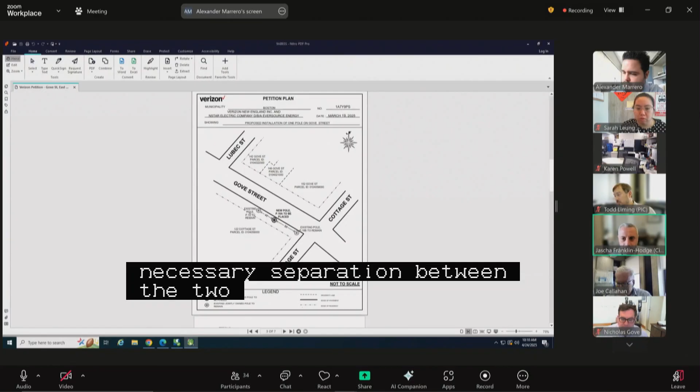All right, thank you very much. Commissioners, questions? Hearing none, I'll just ask one, which is, can you just articulate, these are going to have three poles quite closely spaced together. Can you just explain why that's necessary? I can't respond for Eversource, but my best guess is that their existing three-phase cabling is going to conflict with the new cabling, in terms of spacing between the two sets of cabling that they will be installing. So they're requesting a new pole in order to provide the necessary separation between the two. I see, okay. So there's vertical congestion on the existing pole, and they'll need to have something that would not otherwise be attachable because of those spacing issues. Correct. Okay, got it.

All right, appreciate that. Commissioners going once, going twice, questions? PIC staff or members of the public? I will take this opportunity to remind the public, if you wish to ask questions or add testimony, please use the raised hand function, found under the reactions tab at the bottom of your screen. I do not have any comments or questions at this time, and I do not see anyone from the public, so I think we're all set. All right, do I hear a motion to approve utility pole hearing number 1? I make a motion to approve a joint petition by Verizon New England and Eversource to install the utility pole in the area of Gove Street, East Boston, as further read into the record by the chair.

Second. All in favor? Aye. Aye. Aye. Any opposed or abstained? So moved. Thank you very much.

Thank you. All right, on to the public hearing section of our agenda, starting with public hearing number 1: a petition by the City of Boston Public Works Department for the making of specific repairs within the following public ways in Dorchester, consisting of curb realignment, roadway and sidewalk reconstruction, as well as new and relocated pedestrian ramps, specialty pavement, street lighting infrastructure, storm drain infrastructure, street trees, and driveway curb cuts.

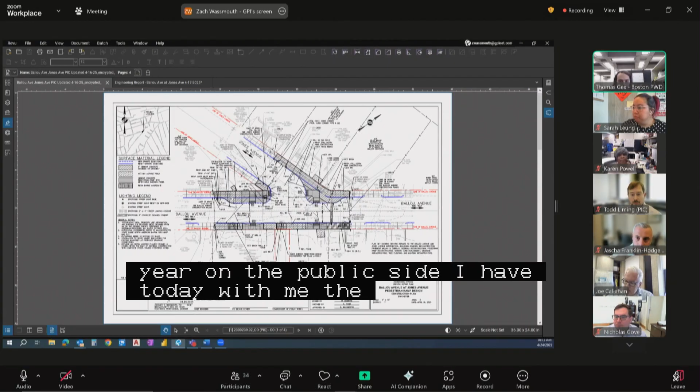Just a little bit of project background in case anyone wasn't here at the previous hearing, new business. This is part of a state of good repair project to repair the streets of Jones Ave, Ballou Ave, Jacob Street, Mascot Street, Dumas Street, Willowwood Street.

This project began because there was a pedestrian bridge, labeled as a discontinuance, that was removed several years ago over the MBTA tracks. As part of the mitigation for that project, we're looking to add improvements to this neighborhood. So this is part of a larger project for state of good repair and sidewalk repairs, et cetera.

So I'll pass it over to Zach, who can go over specific details and what we've addressed from new business. Hi everyone, Zach Wassmouth from GPI, the designer helping out Public Works for this project. A few comments that came in since last time were from National Grid related to the gas line over here that runs at this bump out.

They had some concerns about where some of the infrastructure was located in proximity to the gas line. So the adjustments we made were relocating the street light a little bit, relocating this drainage inlet here a little bit, and removing the tree which was located in close proximity to the gas line at this location.

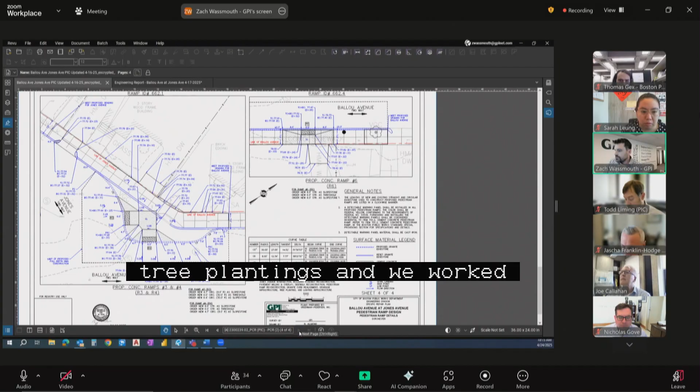Other comments we got were related to the tree plantings, and we worked with the Parks Department to update the details to make sure they were consistent with what the Parks Department was looking for with respect to how the trees were planted. So we added some notes on there and coordinated with them. But in general, these locations are the same. These are just the notes that were added.

In addition, we are working actively with the Parks Department to determine exactly what the tree species are out there. That'll be settled prior to installation and construction. We're also working out a comment that came in from the Planning Department related to the tree planting and the soil underneath.

I think that about sums it up, Thomas. Is there anything else we wanted to add? No, yeah, I think that sums up new business and the comments we received.

Okay. Commissioners, questions? PIC staff or members of the public? All set here. We appreciate the plan updates.

All right, easy enough. Do I hear a motion to approve public hearing number 1? I make a motion to approve the petition by the City of Boston Public Works Department for the making of specific repairs in the area of Jones Avenue, as further read into the record by the chair. Second. All in favor? Aye. Aye. Aye. Any opposed or abstain?

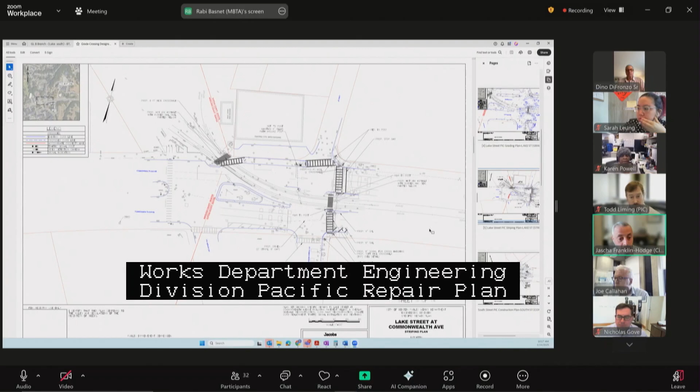This was new business on April 10th, as shown on a set of plans entitled City of Boston Public Works Department Engineering Division Specific Repair Plan, Lake Street at Commonwealth Avenue, South Street at Commonwealth Avenue, Brighton, 14 sheets dated February 2024. Would the proponents please introduce themselves, their affiliations, and give us an update on your proposal since the new business hearing?

Good morning, Commissioners. I'm Dino DiFronzo Sr., the Municipal Liaison for the MBTA Green Line Program. With me today is Rabi Basnet, the MBTA Project Manager. This specific repairs request involves accessibility improvements on the Green Line B branch at Lake Street and South Street. And we are ready to go.

Please note, we had a change in PMs at Jacobs, and because of that, we realized we did not get BTD signals the plans in CAD format. But I spoke with Al Valar yesterday, and we'll be getting those plans to him very, very quickly, hopefully tomorrow. So there's no issue there, but I just wanted to bring that up before Rabi gives you a little technical rundown.

Thank you, Dino. Good morning, everyone. Again, my name is Rabi Basnet, MBTA Project Manager. The proposal of this project is to improve pedestrian crossing along the B branch of the Green Line. These improvements are designed with safety, accessibility, and ADA compliance in mind. The project focuses on the demolition and reconstruction of a series of pedestrian curb ramps along Com Ave at Lake Street and South Street. The main elements being addressed are pedestrian curb ramps and curb extensions.

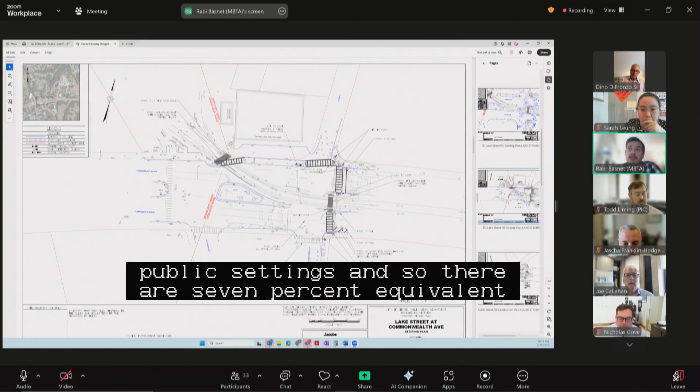There are 7 pedestrian curb ramps that we'll be installing as part of this project at Lake Street. And we have 3 curb ramps that we will be installing at South Street. So that's all the scope of the project.

All right, thank you very much. Commissioners, questions, comments? All right, hearing none, PIC staff or members of the public?

All set on this. All right, do I hear a motion to approve public hearing number 2? I make a motion to approve a petition by the Massachusetts Bay Transportation Authority for the making of specific repairs in the area of Commonwealth Avenue and Lake and South Streets, as further read into the record by the chair. Second.

All in favor? Aye. Aye. Any opposed or abstain? So moved. Thank you very much. Thank you, commissioners. Have a good day. Thank you. You too, Dino.

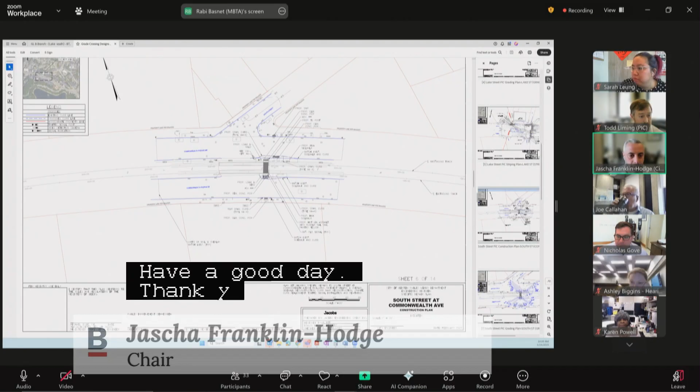All right, on to public hearing number 3, on a petition by Seaport Square Development Company LLC for the acceptance of a pedestrian easement adjacent to Seaport Boulevard public way, South Boston, located on its northeasterly side at address number 88, southeast of Fan Pier Boulevard. New business on April 10th, as shown on a plan entitled City of Boston Public Works Department Engineering Division Pedestrian Easement Plan, 88 Seaport Boulevard, Parcel D, Seaport District, South Boston, one sheet dated March 2025.

Would the proponents please introduce themselves, their affiliations, and give us an update on this proposal since your new business hearing? Good morning, members of the commission. My name is Jody Sanchez from Goulston & Storrs. I'm here on behalf of the petitioner, Seaport Square Development Company LLC, the master developer of the Seaport Square project. I'm joined today by Coleman Horsley from Nitsch Engineering.

We're before you today to respectfully request approval of a pedestrian easement over a sliver parcel relating to the Block D project of Seaport Square, located along Seaport Boulevard between Fan Pier Boulevard and Block F of the Seaport Square project. As a reminder, the pedestrian easement over this sliver parcel will complete a set of adjacent pedestrian easements approved by the Commission in 2022. At the time the sliver parcel was owned by the MBTA; it has since been conveyed to the petitioner, and accordingly we are now seeking completion of the pedestrian easement area.

Since we were here two weeks ago, we have finalized the pedestrian easement with the Commission's legal counsel. I'll turn it over to Coleman to walk through the plan.

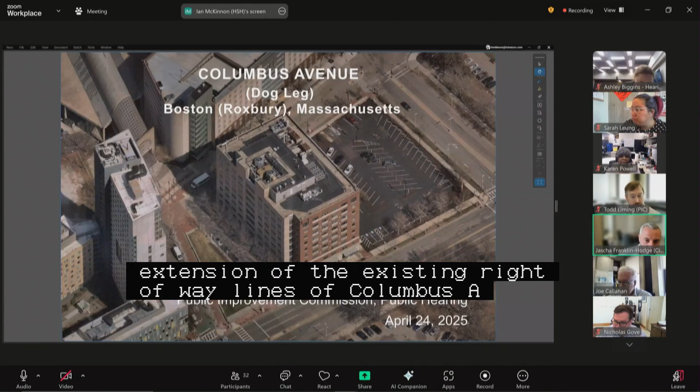On to public hearing number 4, on a joint petition by Northeastern University and the Boston Redevelopment Authority, DBA the Boston Planning and Development Agency, for the widening, relocation, and extension of the existing right-of-way lines of Columbus Avenue, Public Way, Roxbury, as well as for the acceptance of highway easements from its current terminus at Melnea Cass Boulevard to a point at Tremont Street, located generally across from Ruggles Street.

This was new business on April 10th, as shown on a plan entitled City of Boston Public Works Department Engineering Division Widening, Relocation, and Extension Plan, Columbus Avenue, Public Way, Roxbury, one sheet dated February 26, 2025. The proponents, please introduce yourselves, your affiliations, and give us an update on any changes since your new business hearing.

Good morning, Mr. Chairman and members of the Commission. My name is Joe Connolly, project engineer from Howard Stein Hudson. I am presenting today on behalf of the proponents, Northeastern University and the Boston Planning Department. I am joined by Viktorija Abolina of Northeastern and Jim Fitzgerald from Planning, as well as Ian McKinnon from our office.

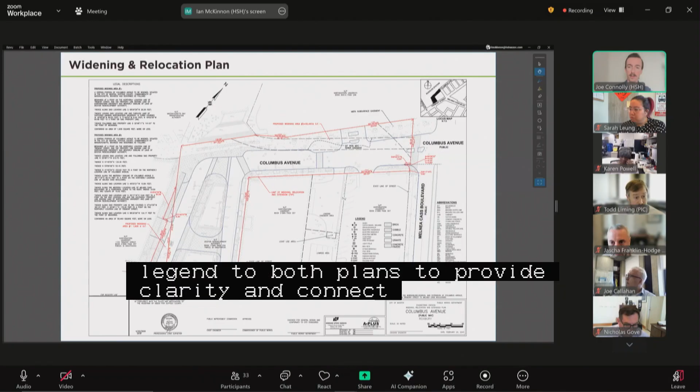We presented at new business two weeks ago for the widening, relocation, and extension of the existing right-of-way lines of Columbus Avenue. There have been minor updates to the plan based on feedback from PIC staff prior to new business. We provided those updates yesterday, but to summarize, we've hatched the specialty roadway surfaces and added a legend to both plans to provide clarity and connect these items to the language in the license agreements. There were no other changes made or requested. So with that, I will open it up to any questions.

Commissioners? I will ask, where are you in terms of the legal documents associated with this, and are there any outstanding issues associated with those? Victoria, are you able to comment on that?

Sure, good morning everybody. Viktorija Abolina, I'm a VP for Campus Plan Design at Northeastern, and I'm joined by Mitali Biswas, who is in the Office of General Counsel. So we're very close. I'm going to let Mitali chime in, but we've been working very closely with the city lawyers, the Boston Planning lawyers, and BPDA lawyers. So I think we've pretty much agreed on finalizing the language, but Mitali, if you can weigh in just on where we are.

Sure. So over the past two weeks, we have continued our negotiations on the pedestrian easement, the two highway easements, and the license maintenance agreement for the specific repairs. The first three—the pedestrian easement, the highway easement with Northeastern, and the highway easement with the BPDA—those are finalized. We have a couple of outstanding questions going back and forth between our end and Chong Liu of the city's attorney to finalize the LMA, but I think we're very close, and hopefully we should be able to wrap that up very soon.

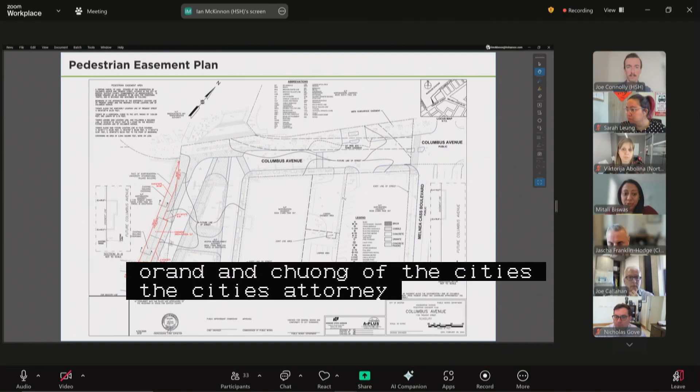Okay, so presuming we approve this action today, the finalization of all of this is still contingent on completion of that agreement, correct? Yes, understood, but just noting that we're very, very close, so hopefully that should not be an issue.

Yeah, got it. And also to confirm—I know this came up in the new business hearing—will the university be accepting maintenance responsibilities for the entirety of this area, including any specialty materials and designs located here?

Yeah, and Victoria, feel free to chime in if you want to add anything. So the improvements are defined in the LMA, and it includes the specialty pavers, etc., and the brick in the streetways, as well as the non-standard light fixtures in the licensed premises area. To the extent that Northeastern, down the line with approval of the PIC, changes any of those specialty pavers, brick, or light fixtures to city standard materials that are then approved by PWD, Northeastern's responsibility for maintenance of those newly city standard materials would cease.

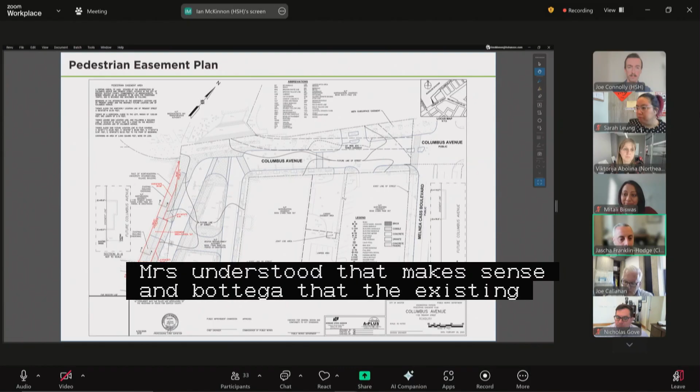Understood, that makes sense, and glad to hear that the existing non-standard materials will be maintained by you all. Those were my only questions. Commissioners, anything else? PIC staff or members of the public? No, all set on this. We really appreciate Northeastern's and BPDA's efforts on this. It's been a long time coming.

Indeed. All right, with that, do I hear a motion to approve public hearing number 4? I make a motion to approve a joint petition by Northeastern University and Boston Planning and Development Agency for the widening, relocation, and extension of the right-of-way lines on Columbus Ave, as well as the acceptance of highway easements, contingent upon completion of agreements as referenced by the chair. All in favor? Aye. Any opposed or abstain? So moved.

On to public hearing number 5, on a petition by Northeastern University for the acceptance of a pedestrian easement adjacent to Columbus Avenue Public Way, Roxbury, located on its southwesterly side at the side of 1155 Tremont Street, northwest of Tremont Street. This was new business on April 10th, as shown on a plan entitled City of Boston Public Works Department Engineering Division Pedestrian Easement Plan, Columbus Avenue, 1155 Tremont Street, Roxbury, one sheet dated February 26, 2025. Would the proponents please reintroduce themselves and their affiliations and give us an update on this action and any changes since your new business hearing?

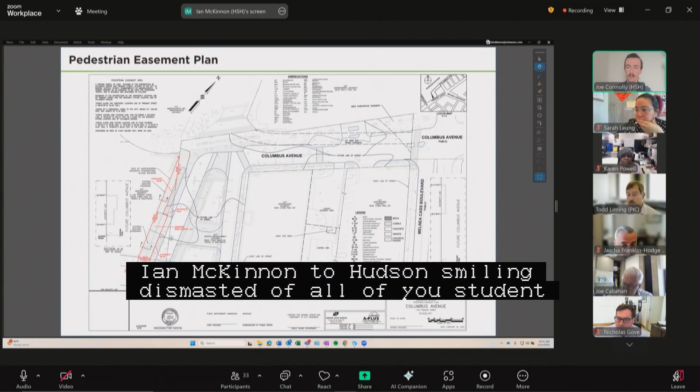Good morning, Mr. Chairman and members of the commission. Again, my name is Joe Connolly, project engineer for Howard Stein Hudson. I am presenting today on behalf of the proponents, Northeastern University and the Boston Planning Department. I am joined by Viktorija Abolina of Northeastern, Jim Fitzgerald from Planning, Ian McKinnon from Howard Stein Hudson, and Ms. Molly Biswas of Northeastern. We presented at new business two weeks ago for the acceptance of a pedestrian easement adjacent to Columbus Avenue. We made some minor updates to this plan based on feedback from PIC staff, which was also provided yesterday via email. Other than that, there were no further changes.

Thank you very much. Commissioners, questions, comments? PIC staff or members of the public? All set on this. All right, do I hear a motion to approve public hearing number 5? I make a motion to approve a petition by Northeastern University for the acceptance of a pedestrian easement adjacent to Columbus Ave, as further read into the record by the chair. All in favor? Aye. Any opposed or abstain? So moved. Thank you very much. We'll see you, I think, in our new business section in a little bit, but thank you very much for this.

Thanks. All right, okay. That concludes the public hearing portion of the agenda, so we can move on to new business, starting with new business number 1: Willowwood Street, Dumas Street, Marden Avenue, Dorchester, specific repairs, and a petition by the City of Boston Public Works Department. Would the proponents please introduce themselves, their affiliations, and walk us through what is being proposed?

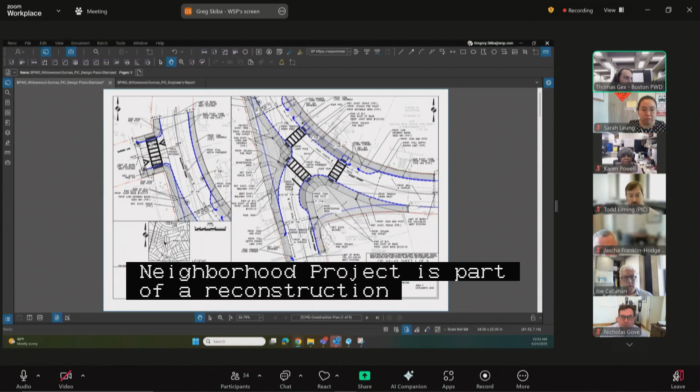Hello and good morning, Chair and members of the Commission. My name is Thomas Gex with the Public Works Department, petitioning for the specific repairs at Willowwood Street at Dumas Street. I'm also joined by our design consultant from WSP. I'll let Greg introduce himself shortly, but first I'll give some background on this specific location as well as the wider project it is part of. The Jones Avenue Neighborhood Project is part of a reconstruction project looking to rebuild the streets of Jones Avenue, Barlow Avenue, Jacob Street, Mascop Street, Dumas Street, and Willowwood Street, bringing them to a good state of repair. This project began as a response to the removal of the pedestrian bridge over the MBTA tracks that connected Barlow Avenue to Norfolk Street, and is done as mitigation for the loss of that bridge.

The project is looking to provide accessibility improvements, safety improvements, and additional street tree canopy throughout the neighborhood by repaving the roadway, reconstructing sidewalks, rebuilding pedestrian ramps, installing new street lighting, planting new street trees, and adding green infrastructure. I'll hand it over to Greg, who can talk about the specific repairs at this specific location of Willowwood Street at Dumas Street.

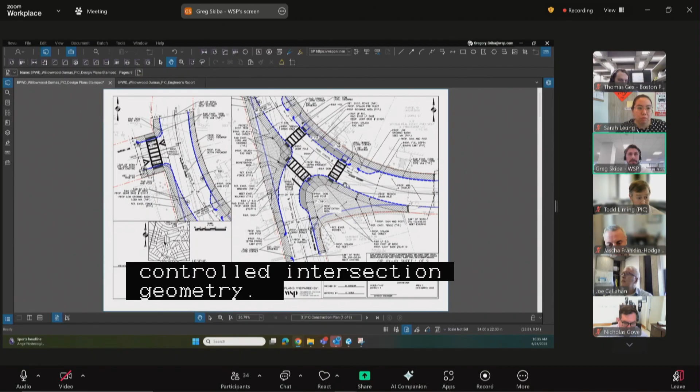By doing this, we are also reducing the crossing distances for pedestrians, installing a number of curb ramps and new crosswalks, and in those bump out areas, as Thomas mentioned, installing green infrastructure practices. We've been working closely with the Office of Green Infrastructure and other city departments on creating this design at the intersection.

It's also worth noting on Marden Ave, we'll be improving the safety and accessibility for pedestrians by installing a raised crossing. We've also run auto turn movements, and this intersection accommodates necessary movements for all vehicles: passenger, single unit trucks, and emergency vehicles. Happy to go into more details.

The other sheets of this package just kind of talk through the pavement design. We'll be doing a full depth reconstruction for the majority of the intersection with green infrastructure practices on the streetscape, and mill and overlay on the extents of the project.

The other details are pretty standard City of Boston details. As I mentioned, we've been working closely with Boston Water and Sewer and other utility companies, making sure that their infrastructure, the catch basins, manholes, and any other utilities are properly adjusted or relocated in the new intersection configuration.

We're also implementing the most recent set of Office of Green Infrastructure standard details in its design. So with that, I'll open up the floor to any questions. Thomas, do you have anything else that I missed that you'd like to add?

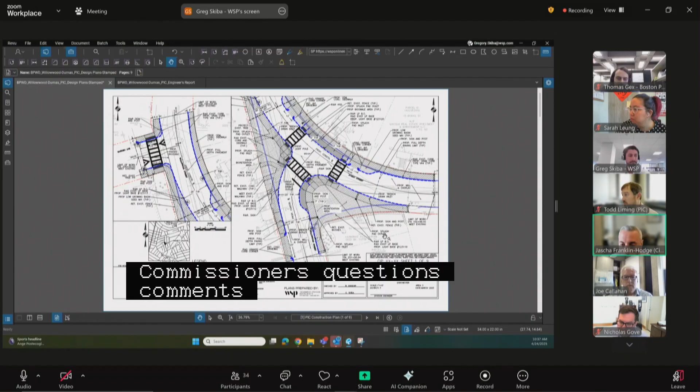Right, I have a couple. The maintenance of the bioretention areas and the green infrastructure features, what is the expectation for that? The expectation at this time is that maintenance will be done by OGI, still to be formalized, but that is the understanding at this time.

Okay, and we've confirmed that all of the plantable green areas of this sort qualify for maintenance under their available resources? I see a growing basin, for example, and it's unclear, is that a green infrastructure feature or just a planted area that maybe wouldn't require maintenance under a different arrangement?

There are a couple different scenarios here. One is a more formal, larger bioretention space. They've just recently given us planting specifications for specific species of plants they want installed there. Where Greg is highlighting to the right, that's a larger area where we can provide some drainage catchments. Some of these are just more of a native seedy grassy mix, which don't really require as much maintenance, and those won't be serviced because they're over the gas lines and utilities, et cetera.

So there's a mixture here of two different locations, but the intent, yes, and we've been closely coordinating with them, and so far this is intended to be maintained by them.

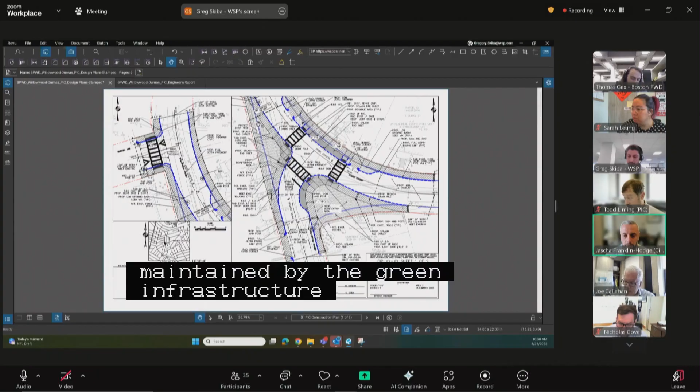Okay, excellent, appreciate that. I think if there are any elements, it would be great before your public hearing if you can confirm that all planted elements will be maintained by the Office of Green Infrastructure, and if there are elements that would require public works maintenance beyond what is typically done for green infrastructure features, things like mowing or trimming, that you coordinate with the public works operations team to make sure they're aware and comfortable with the design. Understood, will do. Thank you very much.

Second question, are there impacts here related to on-street parking that may be relevant to folks in the neighborhood? Because we're pushing it towards the intersection, generally no, the one side where we may be somewhat restricting parking, and it's because the signage is a little—

confusing—where we're putting the bump out between the two ramps on the northeastern side of the page. I can get you an exact number if we double check, but there may be a loss of a couple spaces technically there, but it's kind of within the intersection between a couple driveways. Other than that, technically no other legal spaces, because the curb lines are getting pushed so far into the middle of an intersection.

Got it, okay. And has there been any communication with folks in the neighborhood, or coordination with Office of Neighborhood Services, about parking specifically or about the design in general? We are recently coordinating with them for this overall project. This is kind of a new step for a state of good repair project, and in doing that coordination, I have reached out to the adjacent abutters.

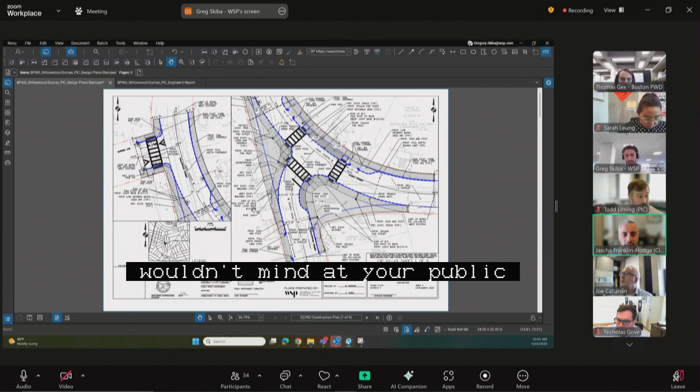Excellent. Thank you. I appreciate the outreach that's already done and still to come. If you wouldn't mind, at your public hearing just provide an update on the engagement plan. It doesn't all have to have been concluded by the time you are here again, but I just want to make sure we have an outreach plan that we will move ahead with as this project progresses. Understood, I will look to provide more details then. Thank you very much, those are all my questions.

PIC staff or members of the public? No, I think we're all set on this for now. Excellent, will you be ready for your public hearing in 2 weeks on May 8th? Yes, we should be ready. Greg, I think we've kind of basically addressed all the comments as far as I'm aware. Yes, I would agree. Yep. Yeah, go ahead, all right. Excellent, we'll see you back here for this then. Thank you. Thank you. Thank you.

All right, on to new business number 2, Medfield Street, Keswick Street, Boston proper, specific repairs on a petition by the City of Boston Public Works Department. Would the proponents please reintroduce themselves, their affiliations, and walk us through what you're proposing to do here.

Good morning, Chairman, members of the Commission. My name is Jeffrey Alexis with the Public Works Engineering Division, I&D team. Joined here by my consultant from Nitsch Engineering, who developed a number of these plans coming up next. As part of our roadway reconstruction program, our state of good repair in terms of providing maintenance improvements along these streets, as well as some additional safety improvements, including sidewalks, ramp reconstruction, the proposal of street trees, street lighting, raised crossings, and additional accommodations for bicycles as needed. I will turn it over to Jeff Sautel to share the plans and introduce himself.

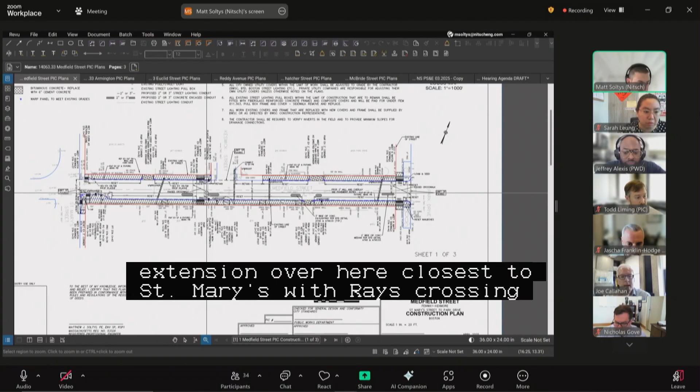Yes, and I'll also jump in that we are proposing to relocate the parking along Medfield Street onto the north side of the street, as the contraflow bike lane will be on the south side of the roadway. Lastly, as I mentioned, we are proposing lighting along this corridor. We are coordinating with the Parks Department as well as planning. I plan on scheduling an interim meeting to discuss how we would need to move forward in terms of the details and specifications for the existing trees. As you can see, located across from Keswick Street, there is a run of street lighting conduit that we're proposing within the roadway to protect the existing tree at that location, which was a request from the Parks Department. We are also proposing concrete medians, cast-in-place concrete medians, as daylighting and protection for the bicycle facility along this corridor.

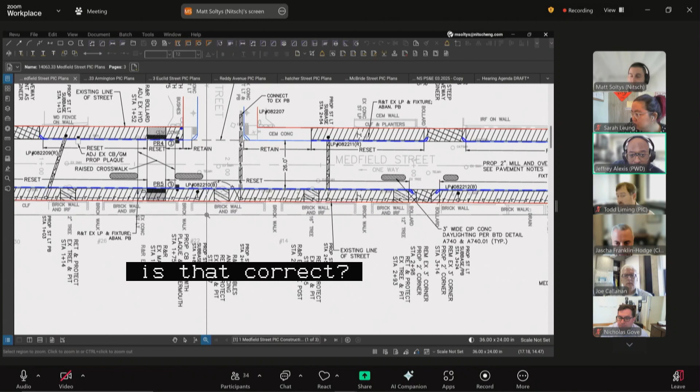Starting with that street tree, can you speak in a little more detail? It sounds like there is street lighting conduit being relocated into the street in order to avoid excavation around the root zone of that tree, is that correct? Yes, that is correct. For this tree in particular, I don't recall the tree species, but the Parks Department requested that we route the conduit around the street tree because of the specific species, noting that if we do excavate along the root system of this tree, it would ultimately kill the tree. So survivability of the tree was an issue here. Specifically, we looked at rerouting it into the street. We are going to be working with the Parks Department to protect the other trees along this corridor, as well as in terms of excavation, because they've cited some current issues as of recent. So we will be looking at incorporating additional details as well as specifications to protect those existing trees along that southern side.

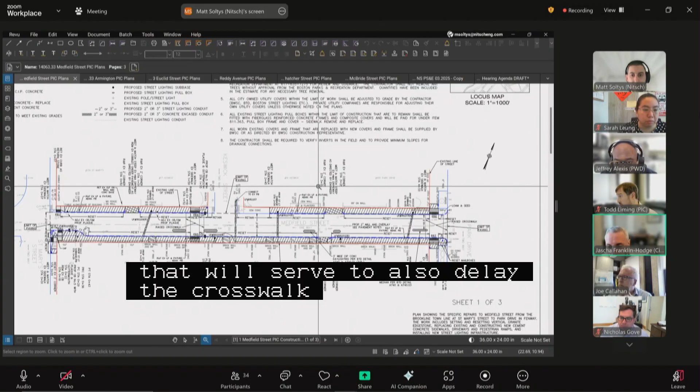Related to that bike lane, I see there is cast-in-place daylighting proposed in a few spots along the corridor. I appreciate the intention at the new crosswalk being added, which will also daylight the crosswalk and prevent illegal vehicle stops that would impinge on pedestrian safety. Can you speak to the reasoning behind the cast-in-place barriers at the driveway toward the eastern end of the street on the south side, as well as the cast-in-place placed at the far eastern terminus of Medfield where it intersects with Park Drive?

Yes, absolutely. Ideally, it was more to serve as protection not only for the cyclists traveling down this roadway. The driveway on the eastern side serves as a driveway for housing in the area, and the intention is for a lot of vehicles to be traveling in and out of this driveway because of the number of residences down this street. The intent is just to provide more visibility and protection for cyclists on this route.

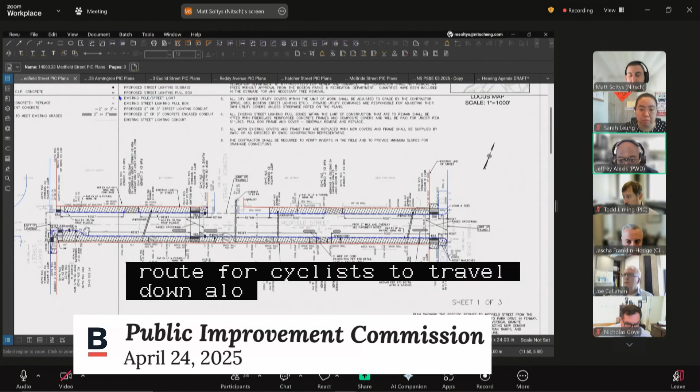This contraflow bike lane was requested by the planning department, who identified Medfield Street as a vital connection in this area to provide access to Park Drive. Medfield Street ultimately connects into Brookline, along a route that is parallel with Commonwealth Avenue. So this is a low-stress, safe route for cyclists to travel along this street. In lieu of proposing flex posts along this corridor, we are proposing these cast-in-place concrete islands.

Got it, thank you, that makes sense. I assume turning movement analysis has been done so that vehicles exiting from that driveway, which now has these cast-in-place elements on either side, will still be able to make those turns. Has that also been confirmed for any larger scale vehicles that may be using that?

I see, for example, it looks as though people keep their trash down there, and there are quite a few trash cans visible down that driveway. I want to make sure our trash trucks are able to get down there easily as well, along with moving vans and other things people may be trying to put into that driveway beyond passenger vehicles.

Yes, understood. We'll review and confirm that we are not impeding access for trash trucks into this driveway. We'll confirm if we need to make changes—we can shift the length of these cast-in-place concrete medians.

Yep, would very much appreciate that. I know sometimes for vehicles that are not our design vehicle, we make it possible but not easy to get in, and knowing that trash trucks may be going down here every week, we'd like to make it at least not an especially complex maneuver for those folks. So just another look would be appreciated.

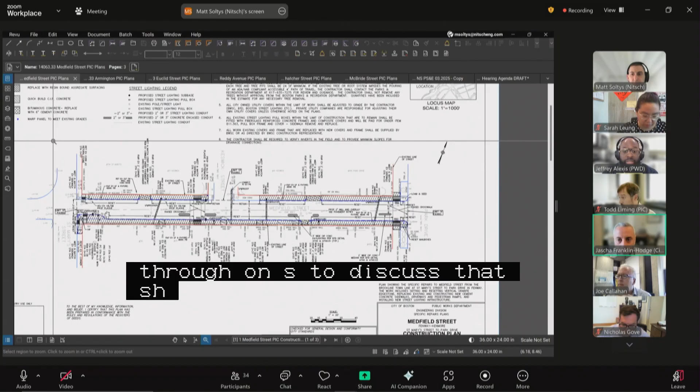Yes, in terms of parking, we reached out to the community to inform them of the change. There is a slight reduction in the number of spaces along the corridor, but that was not a concern from the community regarding those couple of spaces. The importance of this project was us being able to provide the contraflow bike lane and these other safety improvements. In terms of parking usage and utilization along the corridor, it wasn't going to be impacted—that's something we confirmed prior to making this change.

All right, excellent. Great, I don't think I have any other questions. EAC staff or members of the public?

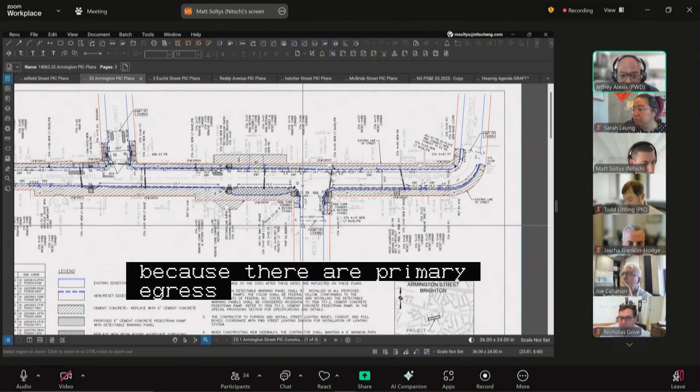We wanted to propose a symmetrical alignment in regards to the curbs along this corridor. We are looking at shifting the curb lines to provide our standard, or somewhat substandard, sidewalk width as we're able to provide along this corridor, which generally has a substandard roadway width.

We are proposing cast in place concrete medians in regards to daylighting along the corridor, as well as an additional crossing that connects the Jackson Mann to the Horace Mann, which is underneath, I want to say, a sky bridge for the two schools.

The last thing I want to mention is that the Horace Mann School was actually relocated to Charlestown this past summer, and the building is currently being used by the BCYF, Boston Centers for Youth and Families. We will be coordinating and reaching out to them to ensure that these changes are not impacting their operations.

I did connect and reach out to BPS Facilities Management in regards to these improvements. They are aware of these changes and have approved them, but as the BCYF is now using this building, I will inform them of these changes so that they're aware. With that, I'll turn it over to Matt to go into a little bit more of the details.

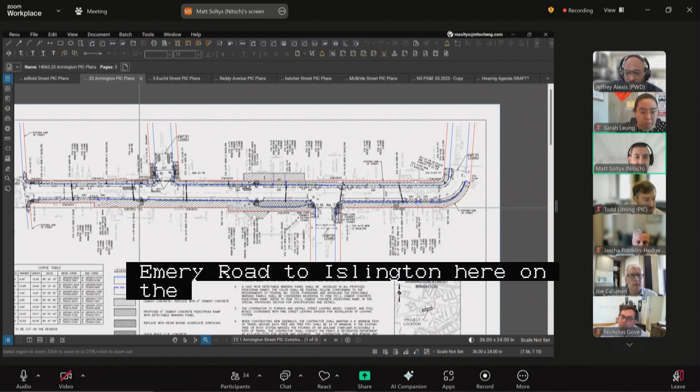Once again, seeing those cast in place concrete daylighting. In terms of the new crosswalk right here at Horace Mann, that one is also proposed with a rectangular rapid flashing beacon. In terms of Barrow Street, little minor geometric curb improvements here, just straight lining those curbs.

Once again, truck turns were checked for a single unit Boston Fire truck, but we can double check those with the concern about Medfield with trash trucks, and just make sure those cast-in-place islands are in the right place. I think that's pretty much it. Jeff, you hit on the main topics, so I'm not going to reiterate those.

I'll simply add, there is a tree existing on Armington Street that we are maintaining along the corridor to the right of Webley. So we are maintaining that tree.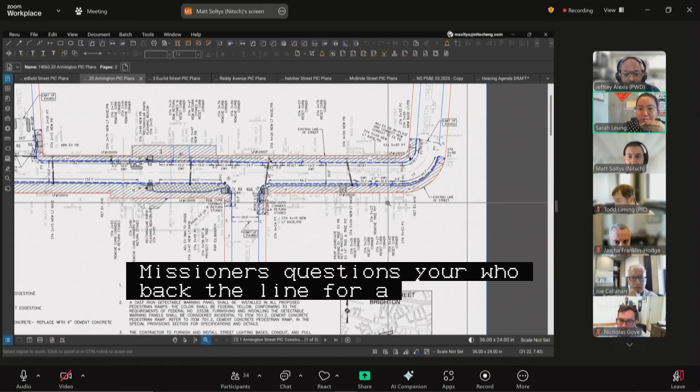Excellent, thank you very much. Commissioners, questions? Hi team, just wanted to ask if you could clarify the exact dimension of clearance at the existing tree, and if that could be documented on future plans, just for clarification.

Yes, we'll take that. Matt, do you have that? I don't have it handy, but we can definitely look into that and provide it. Jeff Sawtelle, do you happen to have that handy? If not, we can follow up on that. There should be 4 feet from the back of the proposed curb to the edge of the existing tree pit, based on this new widening.

Great, perfect. If that could just be documented on the plans, that would be great.

I also want to commend the team for the amount of outreach they've done in regards to this project, especially regarding the community uses that surround the street.

Thank you, Sarah. I just want to add that the additional crossing we're proposing with the RRFB was a request from Horace Mann, since this is a passage the community uses to gain access to a park on the other side of the street. This was something they requested, and we were able to provide it. Given that they're no longer there, I think it will ultimately be an improvement that serves this community in the future.

Thank you. Commissioners, other questions?

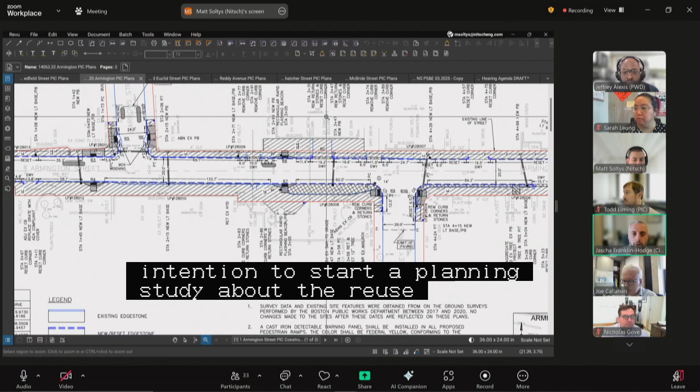I'll just say thank you for the outreach to BCYF. I participated in a city council hearing last week where the Public Facilities Department expressed intention to start a planning study about the reuse of both the Jackson-Mann and Horace-Mann buildings for BCYF purposes. So I think just confirmation with both BCYF and whoever's leading that effort at Public Facilities that these changes seem fairly straightforward and compatible with our broad goals around safety and accessibility. I don't imagine there are major issues, but I want to make sure they're aware and comfortable with this moving forward relative to the planning work they intend to do. It would be great to confirm that.

Yeah, absolutely. All right, PIC staff or members of the public? I think we are all set on this one.

All right, will you be ready for your public hearing in two weeks on May 8th? Yes, sir. All right, we'll see you then.

On to new business item 4: Euclid Street, Withington Street, Dorchester, specific repairs on a petition by the City of Boston Public Works Department. Would the petitioners please reintroduce themselves, their affiliations, and walk us through what is being proposed?

Good morning, Chairman, members of the commission. Once again, my name is Jeffrey Alexis with Public Works Engineering Division, Infrastructure and Design, here petitioning for the reconstruction of Euclid Street between Withington and Washington Street.

Ideally, these are for the most part maintenance improvements. We are providing some daylighting along the corridor. We are proposing some new trees with a planting treatment that will provide resin bound stone within the tree pit area. As I mentioned, we'll be coordinating with the Parks Department to determine the detailed specifications and which specific trees we'll be proposing along the corridor. There are a number of them.

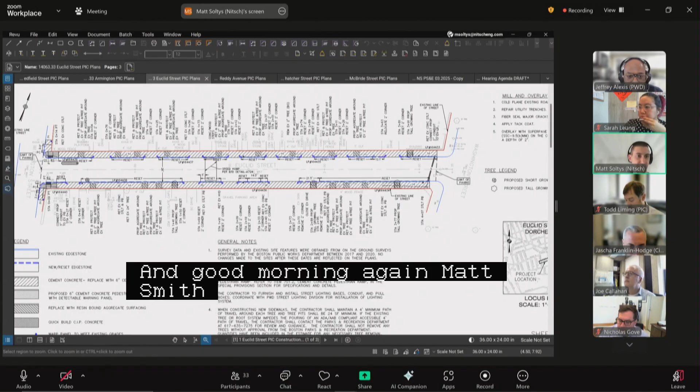With that, turn it over to Matt. Good morning again, Matt Soltys with Nitsch Engineering. Just to build on what Jeff presented, we have a cast-in-place daylighting closest to Withington Street, and there's a proposed speed hump in the middle of the street near number 11 as well. Primarily we're resetting the existing curb, doing a mill overlay, and concrete sidewalks, and retaining and proposing new trees.

Excellent, thank you. Commissioners? Similar to my previous comment on the petition, any key points, we could just mention those to ensure we call them out. Yeah. Yep, sounds good.

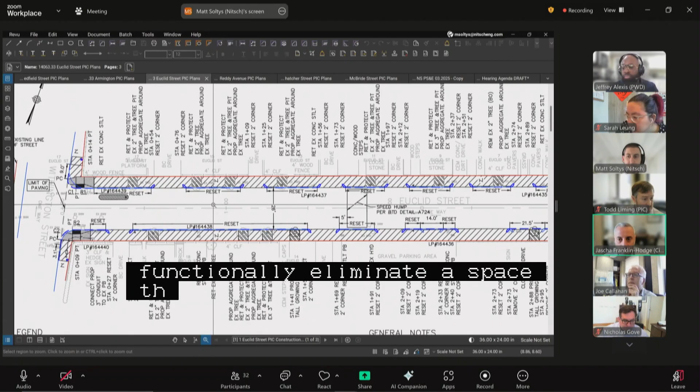My only comment relates to the daylighting proposed on the west side where Euclid meets Withington. While it appears the daylighting is in an area that would not be considered legal parking today, it does appear to be signed as a legal parking space just east of the existing street light, if I'm oriented correctly here. So I think because this will functionally eliminate a space currently working as a parking space, please make sure there's some outreach to ONS and some communication with the neighborhood. Again, we have created a legal parking space in contrary to our own rules about spacing from crosswalks, and the daylighting here is important, but I want to make sure it doesn't come as a shock to people in the community.

Yes, absolutely. We'll reach out to ONS to connect with the community and let them know that this will impact at least one parking space on Euclid.

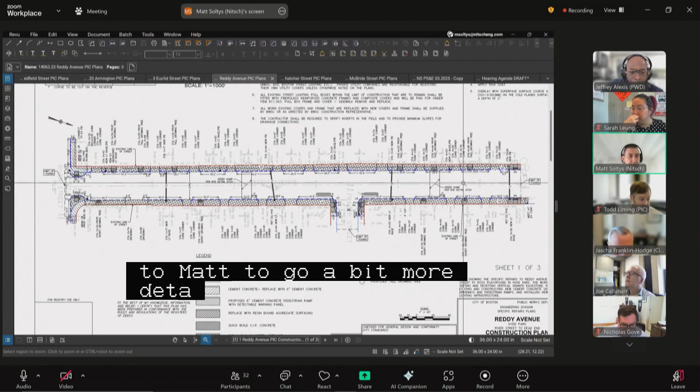Thank you, Matt Soltys, again with Nitsch Engineering. So yeah, we are proposing reconstruction on Reddy Avenue from River Street to Ross Playground, which is to the north. Project includes replacing the existing HMA sidewalk with new concrete sidewalk.

Closest to River Street, curb extensions with the pedestrian crossing improvements there. We are also proposing new street lighting conduit, as Jeff noted, on the north side, and then 2 new speed humps on either side of the side street, and then crossing over to Ross Playground, proposed cast in place concrete daylighting over at the Fraser Street intersection.

Once again, there's street trees out here as well, and we're happy to note that any pinch point crossing distances we talked about for the other projects, that's primarily it. I'll note that we'll work with parks in regards to the proposed species along the corridor as well.

Excellent. Commissioners, questions?

One thing I'll mention, we did receive a request to take a look at the entrance to the park. We are currently proposing pedestrian ramps to provide access. The request was to take a look at extending the sidewalk along here and providing a standard driveway for the entrance to the park. So that's something that we'll take a look at in terms of the drainage, as well as the access here to make it accessible for pedestrians.

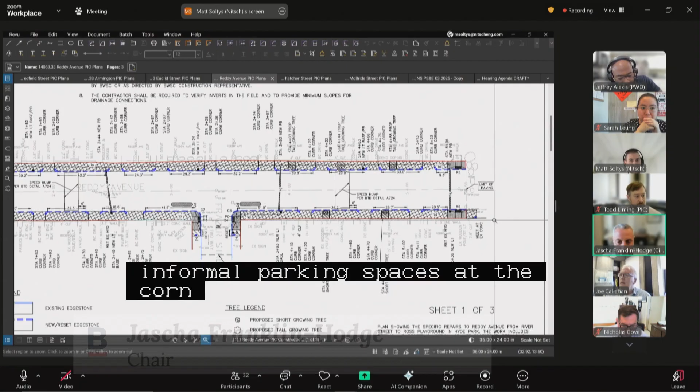Thanks, Jeff. That was one of my questions, so I appreciate you working with Parks on that. The second thing I have is similar to the last one. We are forcibly eliminating 2 informal parking spaces at the corner with Fraser Street here. So just wanting to make sure there is good communication with the neighborhood about that in advance of moving towards construction. Yes, will do.

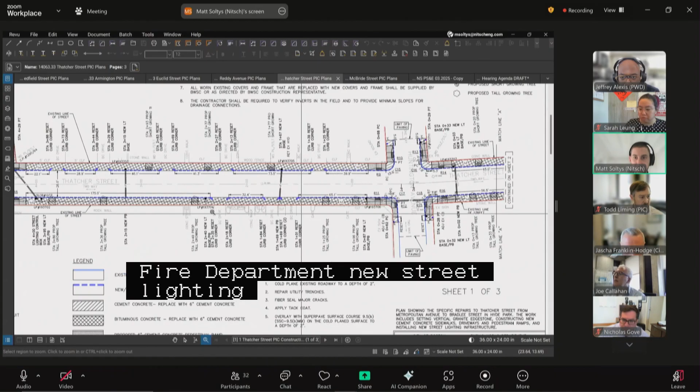Getting to the intersection with Huntington, minor curb extension improvements there, not as significant as Metropolitan Avenue. And then ending on Bradley Street, primarily in this northeast corner, curb extension here was bringing out that radius to shorten the pedestrian crossing distance as well, with new street conduit there for the street lighting.

Project also includes working with Parks on the street trees. I think that was about it. Primarily just road improvements, with the curb extensions being kind of the bigger change here. Yes, and we'll follow up with Parks in regards to specific tree species that we want to propose along the corridor.

Thank you very much. Commissioners, questions?

Can you speak to the intention of the street lighting conduit? Currently, I believe the street lighting here is on utility poles, on the north side of the street. It looks like we're adding new conduit. Are there bases being installed, or what are we doing with that?

Yes, so as shown here, I think the street lighting department actually requested that we propose underground conduit for this corridor, and I think they're proposing alternating lighting sub-bases at this location. So we're ultimately just proposing the underground as part of our improvements, and street lighting will come in and install the poles as well as the lighting fixtures as part of their standard operation.

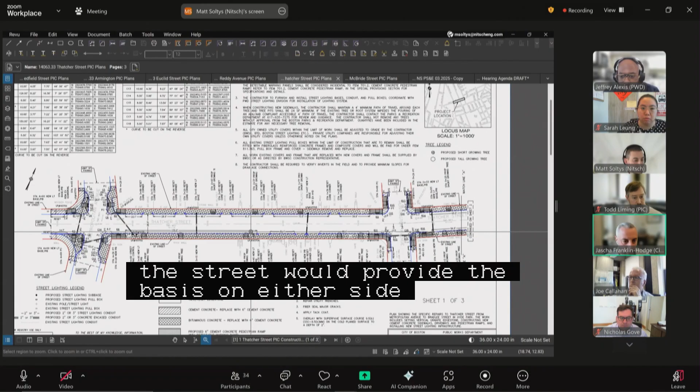Okay, appreciate that. Yeah, hopefully some good lighting upgrades for the neighborhood. The spacing on those is not ideal today in its current iteration.

So appreciate that. No other questions from me, PIC staff, members of the public? All set on this. All right.

Will you be ready for your public hearing in 2 weeks on May 8th? Yes, sir. All right, see you back here then for that.

And on to our last public works item. New business 7, McBride Street, Lee Street, Boynton Street, Call Street, Jamaica Plain, specific repairs on a petition by the City of Boston Public Works Department.

The proponents please reintroduce themselves, their affiliations, and walk us through what is being proposed. Yes, thank you, Chairman. Members of the Commission, Jeffrey Alexis, Public Works Engineering Division, Infrastructure and Design, joined here by Matt from Nitsch, petitioning for the McBride Street improvements.

This is also a community request in terms of repairing the sidewalks, proposing concrete sidewalks along this corridor. In addition, there was a request for us to propose a contraflow bike lane along this corridor.

Coordinating with DCR and their improvements to the Southwest Corridor Park, we are also proposing a raised crossing at that location that will ultimately provide access. It is a wider crosswalk than our standard to improve the accommodations for the shared path for cyclists and pedestrians.

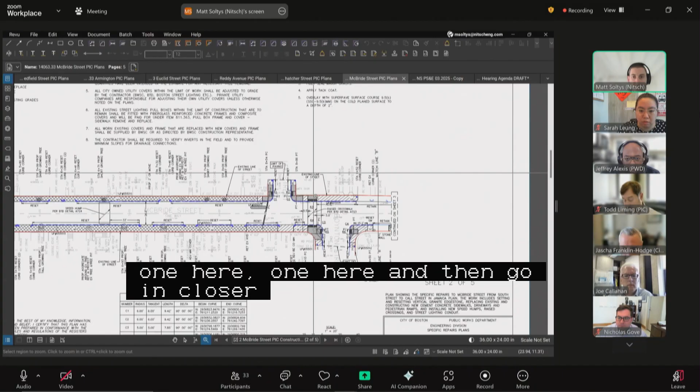With proposed cement concrete daylighting, as well as curb extensions, slight curb extensions there at the intersection with Boynton Street as well, just to reduce the pedestrian crossing distance and get those 2 separate ramps to work out a little bit better grading-wise.

And then a new proposed raised crossing at the Southwest Corridor Park crossing as well. That's a 15-foot crossing width, just a better flow from the existing path north and south.

And street tree improvements similar to the other projects, and we'll coordinate with Parks on that. That's primarily the bulk of it that I have for my notes.

All right, commissioners, questions, comments?

Just to confirm, currently on the east side of the Boynton Street intersection, there is a crosswalk over McBride that does not have a receiving ramp. It appears that crosswalk is being eliminated in favor of one over McBride on the west side of Boynton Street. Is that correct? Yes. Okay, excellent.

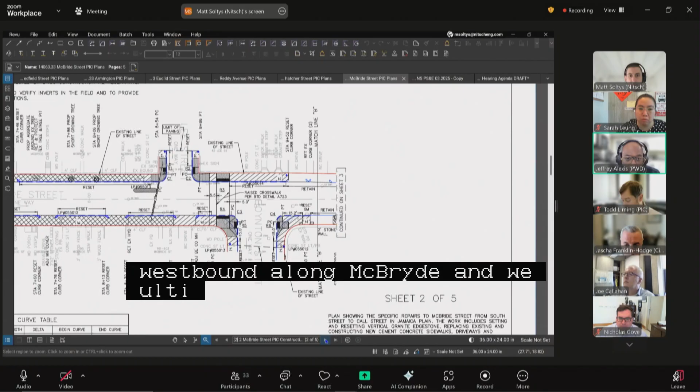McBride Street turns into a one-way at this location, so for the most part vehicles are going to be turning left here onto Boynton Street, traveling westbound along McBride. We ultimately received the request to make sure we provide additional and sufficient signage stating this section is one-way and vehicles should not enter this street from this location to travel westbound, except for bikes. Got it. Okay, excellent, much appreciated.

No questions from me. Anyone else, commissioners? PIC staff or members of the public? All set on this.

Will you be ready for your public hearing in 2 weeks on May 8th? Yes, sir. All right, we'll do this marathon again. Thank you, Jeff and team, very much. Appreciate it, and thank you. A lot of great improvements in the neighborhood, so it's good to see. Thank you, Jeff. Thank you, Chief.

All right, with that we are on to new business item 8: North Margin Street, Thacher Street, Boston proper, grant of location on a petition by NStar Electric Company, DBA Eversource Energy. Would the proponents please introduce themselves, their affiliations, and walk us through what you are proposing to do?

Phyllis Galloway, right-of-way agent at Eversource, filling in for Katie Flaherty. Eversource respectfully requests to install conduit in North Margin Street and Thatcher Street, and to install one new sidewalk vault, SNV 725, including a network transformer, in North Margin Street. This work is necessary to improve and ensure electric service reliability in the area. Eversource will be retiring Station 30 in the near future, and we need to build new infrastructure to refeed the customers currently fed from the station, which is why we're requesting to install the SNV in the sidewalk.

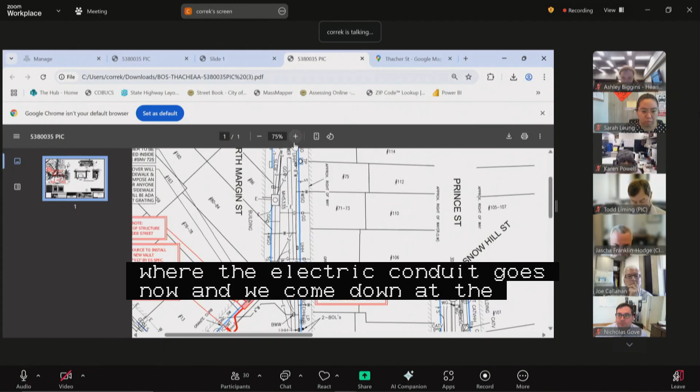So basically, we're at the corner of Thatcher and North Margin. This is Prince Street over here, and we're coming down Thatcher Street, going through existing manholes along where our electric conduit goes now, down to the intersection at Thatcher and North Margin. From manhole 358 up to our end point at manhole 5334, we have existing electric conduit, but the sidewalk vault is going to go right in here, between the manholes. It is part in the sidewalk, part in the street.

We've had discussions with people from the city, various agencies. It's going to be like a molded cover, so you won't see the street end of it. The entrance to the vault is actually within the sidewalk area. It'll be flush, ADA compliant, etc.

If you want, I have Google Maps up here. This is just super congested up here, so trying to find space for a vault was tough, but let me try to get to my internet here. Bear with me, I can show you exactly where this is going. I had it up, but it's not... I get all these bars from the meeting covering my search bar, so I can't move anything. All right, so if I go to Google Maps.

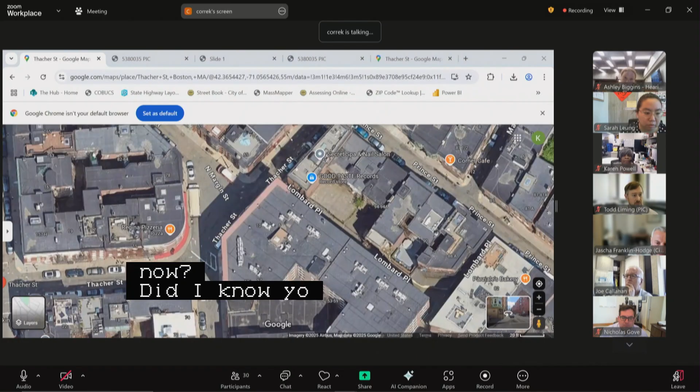Google Maps, here we go. All right, so my guy is down in this intersection. Let me get my bearings here.

Okay, so this is Pizzeria Regina on the corner right here. So I'm going back here toward this area here, where there's this red door, and these kind of odd brown panels or doorway, I don't know what they are. On the sidewalk, we're actually going in the sidewalk right in that area here, you can see it better. So it'll be right here where my arrow is, if that helps. Yeah, that's very helpful, appreciate the visual orientation here.

And we tried a few different places trying to keep it more out of the way. It's just everything under the roadways are so congested there that there really was not another option.

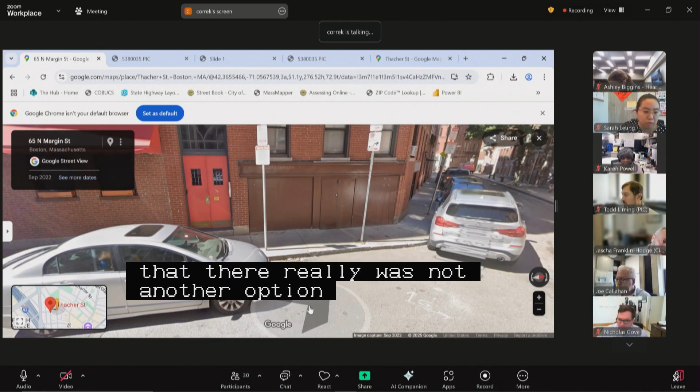So I don't know if you want plans up again or anything. Yeah, that's great. And so it looks like you'll be doing trenching in the roadway, kind of going back to essentially the front door of Pizzeria Regina and then down along the side of the building, and then again down Thatcher Street. Is that correct? For the conduit?

Yes. I understand you have some existing manholes, but I'm seeing installation of additional PVC in the plan set. So yeah, just the PVC being our pipe, but no new manholes. That's the only underground vault structure going in. Got it. And all the rest of it is we're going to go through existing manholes, it's just we need to place new conduit. Okay.

All right, thank you. Commissioners, questions? I was wondering if the team could clarify the amount of sidewalk construction needed to install this vault, and whether or not the pedestrian ramps at the kind of three-way intersection of North Margin Street and Thatcher Street will be impacted as part of the vault installation or trenching installation.

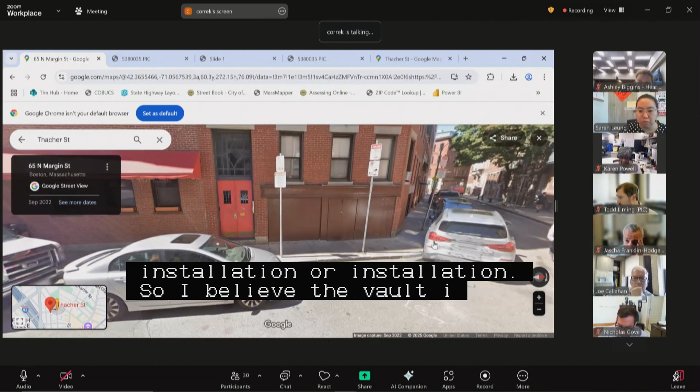So I believe the vault is only going to be in this area. It shouldn't impact the pedestrian ramp at the corner here. And this is the only area where we're going to be impacting sidewalk. All the rest of it will be in the roadways. Yeah.

Commissioners, other questions? Will there be any issues related to vehicles parking on the street at this location once construction is complete? No, once it's complete, everything will be back as is. Okay, so there's no structural concerns with the vault underneath.

Correct. And the location of the vault entry is not going to be in front of the red door, correct? It will be along these brown, whatever these brown panels are? Correct, right in this area here. Okay, got it.

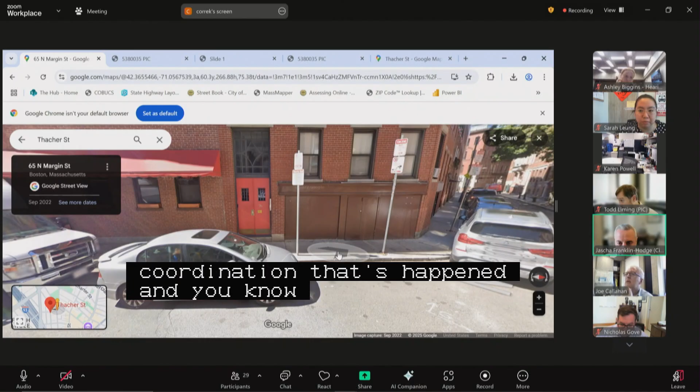Given that this structure, I don't envy anyone trying to do utility work in the north end, but given that this structure appears in the plans to be right up against the foundation of the building, has there been any abutter coordination that's happened, and any kind of work done to ensure that the abutter is comfortable with potential construction impacts, and just any potential for if there's an issue related to the foundation of the building during excavation, that there's a line of communication there between the abutter and Eversource?

So my apologies, I can't speak to any conversations or what's happened at this point so far. I can certainly guarantee we will make that coordination before we start construction. Okay. I can go back to our public affairs liaison and our ops team and see if they've spoken with anybody. We can certainly have answers for you at public hearing time. Okay, that would be great, yeah.

We did ensure one of the questions notifying the city agencies was access to that red door during construction, because we know we're close in there, but we are going to have police details and people will be able to pass in and out of that door as needed. Okay, that's great to hear.

And would just appreciate if that conversation hasn't taken place, that it happens before your public hearing and that you report back to us the status of that. Obviously nobody likes construction literally at their front door, but we just want to make sure that there's good lines of communication open, and especially if there are any structural impacts or concerns, that those get addressed up front. Understood. All right, no more from me, PIC staff, or members of the public?

Would the proponents please introduce or reintroduce themselves and walk us through what you are proposing to do here?

Good morning, Mr. Chair, members of the commission. My name is Chris Hodney, project manager with Nitsch Engineering, civil engineer working on the project. I'm joined by quite a few folks this morning: Brian Bowers with ACCOP 840 Columbus Ave, Justin Karen and Kirsten Brown with North Star representing ACC, Maureen Hickey, Victoria Abelina, and Natalie Biswas from Northeastern, and Ian McKinnon from Howard Stein Hudson, all working on this project and all here.

So I'm going to walk through the proposed work at 840 Columbus Ave. As you mentioned, this is related to an earlier item on the agenda for turning over Columbus Ave to the city. Getting ahead of myself there.

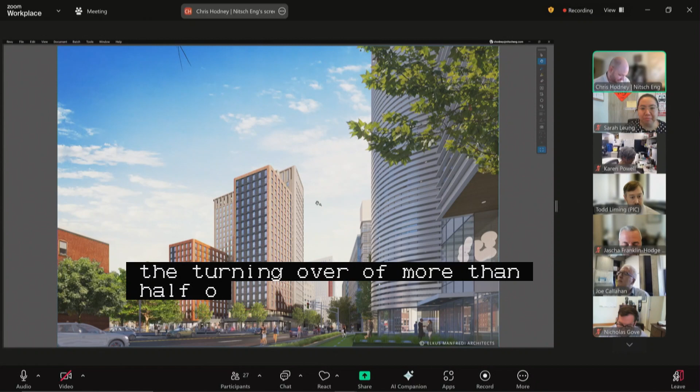The proposed project is a new student housing building on the site of an existing parking lot. You can see a rendering of it here, standing along Columbus Ave looking towards the building. We're here for specific repairs associated with that along street level. This rendering shows what we envision this will look like in the future, just to give you an idea as we're walking through the plans.

I'm going to start on Tremont Street. We've got three streets here: Tremont Street, Melnea Cass Boulevard, and Columbus Ave. We'll walk around starting on Tremont Street, zooming in here, starting from the building and working our way out. The building is this dark line here.

On the private property portion of the land, there's going to be a small strip of paver, which will then transition to cement concrete city standard sidewalk. You can see the hatch here, which indicates the pedestrian easement for where the city sidewalk is going to extend onto the private land. From there, that sidewalk varies in length from about 9.5 feet on the left side where we're tying into existing, up to 12.6 feet at its widest point.

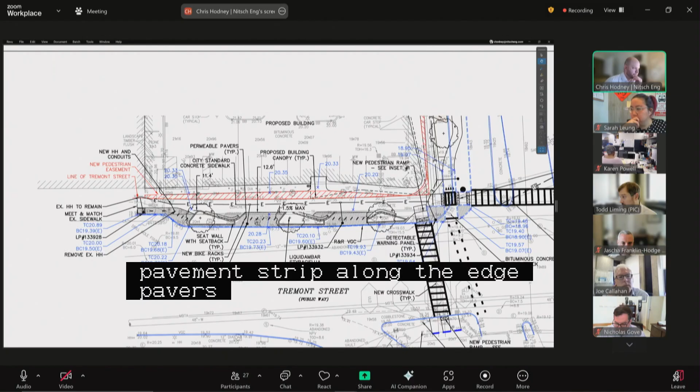From there, we're going to transition into having some seating along the edge of the sidewalk, including seat backs and cutouts for wheelchairs. We've worked with Sarah and the disabilities folks on this. We also will include a porous pavement strip along the edge with porous pavers, bike racks, and streetlights. We also have three new trees going in along this section of roadway, and we'll be reconstructing the existing pedestrian ramps to make them compliant, including the reciprocal ramp across the other side of the street. You can also see we've got a ramp here, which I'll get to on the next page.

Flipping around now, we're on Melnea Cass Boulevard. We've got Tremont Street on the left side, Columbus Ave on the right, and our new building on top of the plan. Walking through this again, starting from the building, we'll have a similar paver strip which will transition out to the city standard concrete sidewalk. One thing to note is that the building's first floor elevation is at 20.33, about 1.8 feet higher than the top of curb elevation is today.

The way we are accomplishing that grade change is with a wall here, kind of checkmark shaped, and another wall here with stairs in the middle. We also have the sidewalk sloping down at less than 5% to this access point, which gives access to the drop-off zone in front of the building. Likewise, it'll slope down at less than 5% towards Tremont Street as well, so it's all done in an accessible manner. It doesn't require handrails; it's not a ramp.

Also shown here, similarly we're going to have more bike racks along here, additional trees along the stretch, street lights, and a raised cycle track which will be at sidewalk level. You can see it from the intersection here—it'll slope up, be at sidewalk level through this area, then slope back down to roadway level at the Tremont Street intersection. Beyond that, there are more plantings and permeable pavers.

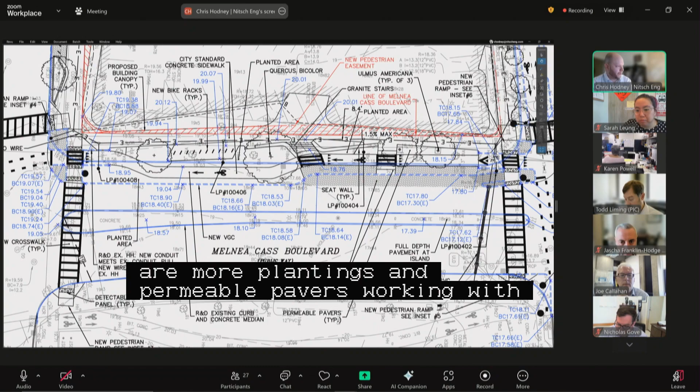In working with Sarah and the disabilities team, we have added access to this drop-off area. So we have a cement concrete sidewalk which crosses over the cycle track, and we've also graded in this level access at the backside of the drop-off area, which gives access through where pedestrians would be crossing, and this level access to the backside.

And then also when we get over to the intersection here, we were in front of PIC a couple of years ago with Northeastern to reconstruct this corner of the intersection, which included some raised islands to separate the cycle track and pedestrian crossing area to give a little more protection. This project will finish that work, so you can see the new curbs here, as well as on the other two corners. This is really just to finish out that plan for the intersection.

So moving around to Columbus Ave, this is the right-of-way which was approved this morning. We have the proposed building at the bottom of the plan now. The cement concrete sidewalk is going to be essentially right up against the building in most places. There's a small area of pavers in front of the building. That sidewalk goes out similar to the other streets. We're going to have some bike racks, trees, and seating. We're reconstructing the pedestrian ramps as they cross Columbus Ave.

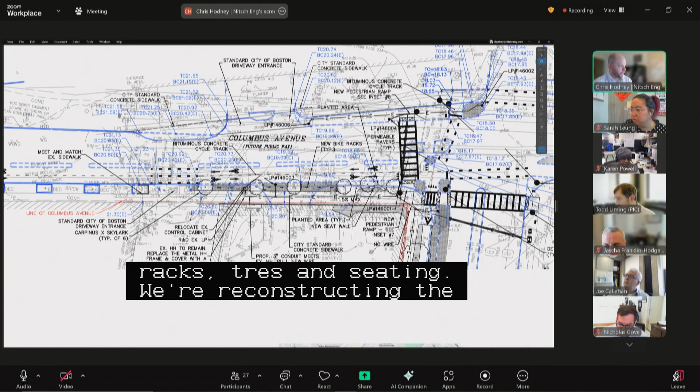And we're also proposing a street-level cycle track, two-way cycle track, which will be protected by raised concrete islands, which we're on a few other items this morning, in lieu of the flex posts. So those will be these oval-shaped items in the street.

To provide room for that and to allow vehicular access through here, we're making some adjustments to the curb line on the opposite side in front of the Northeastern Renaissance Park garage. You can see the proposed curb line here, straightening it out in this area. This will also give us more space for the blue bikes, which are in this location. Then on the plan left side here, the curb's getting pulled back in just a bit to narrow down this pinch point, which is being created by the cycle track.

So I mentioned we have a couple of ped easements. Those are shown on these two plans, and that's just so that we can cover the entire section of concrete sidewalk that is acting as the public sidewalk but is on private property. So that's on Tremont Street and on Melnea Cass, and we do not have one on Columbus Ave. So with that, I'll turn it over to you for any questions.

Thank you very much. Commissioners, questions? All right, I have a couple.

If we could go to the intersection of Tremont and Melnea Cass - I see that in looking at the ramps going across to the left here, that's Columbus. Oh sorry, Tremont and Melnea Cass. So I see that you're kind of creating a new ramp across Tremont Street here, replacing the existing crossing on Tremont Street, and fixing the ramp on the island, the sort of slip lane pedestrian island there. I guess my question is, now that I have accessibly accessed this island, how do I get anywhere else? And is that crossing accessible as well?

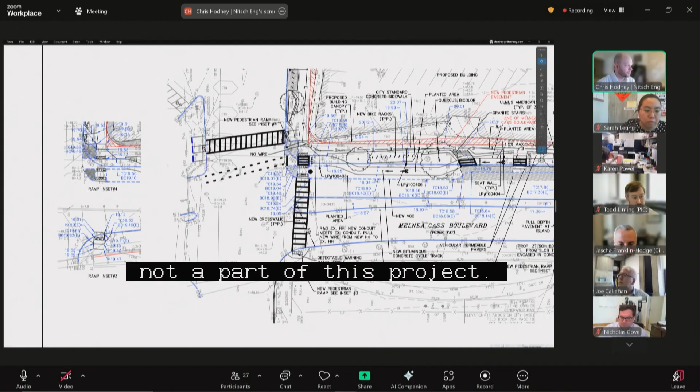So we only looked at the reciprocal crossing. Here, there's an existing ramp today. There is a crossing, you can see it over here. That's not a part of this project, so we haven't looked to see if that is compliant, so I'm not aware. But there is access - this would be the way. This is the slip lane to get onto Melnea Cass from Tremont, and this would cross you over onto the far side of the sidewalk on Melnea Cass.

So, I will defer to Sarah and the Disabilities Commission on this, but my general feeling in a situation like this is that we do the public a disservice if we create a half-accessible crosswalk. We're inviting people to make that journey across to a slip lane, and then they are literally stranded on an island if the remainder of the crossing opportunities are not accessible. So it seems to me that while the letter of a reciprocal ramp may simply specify the receiving ramp on the other side of this crosswalk, the spirit of it is to create a fully accessible crossing opportunity to somewhere useful, which this does not do if the other crosswalks off of this island are not also accessible. So again, with full deference to Sarah, I would be interested in seeing the proponents evaluate the accessibility of those other crossings and look at whether this project, if they are not up to snuff, could address that at the same time that we are addressing this one specific crosswalk.

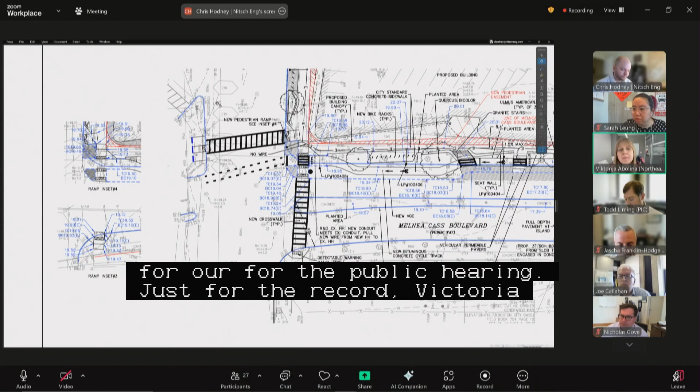Just for the record, Viktorija Abolina, AVP for Campus Planning and Design at Northeastern. As we coordinate, is there anyone from planning or BPDA? Because Crescent Parcel is a project approved by BPDA as well, and I just wanted to know their status. We've talked to the proponent before for Crescent Parcel, and they were moving forward at a similar pace. I believe the reason we weren't expanding further was because Crescent Parcel had PIC action associated with it. So we'll need to coordinate with that developer to make sure we're not designing for them or duplicating work. But we're happy to address that, because we don't want anyone stranded on that island.

No, happy to see this. If this is going to get taken care of by another project, then some coordination there is sufficient. But would love to see us have a plan, so would appreciate the proponents working with the planning department and that other developer to look at options for that. Yeah, we'd be happy to. Much appreciated. Second question here.

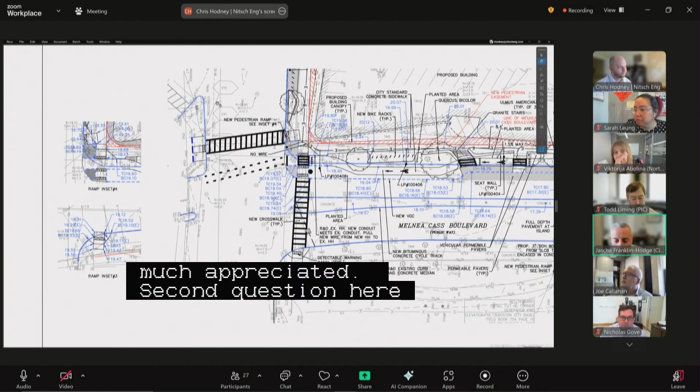While we're on this sheet, it relates to this cycle track showing a connection across Tremont onto Melnea Cass. Appreciating that the PIC typically does not get into the weeds of signal phasing and whatnot, I'm a little perplexed by the purpose of this crossing here over Tremont Street, and also the more fundamental safety question just relates to the signal phasing.

The movement off of Melnea towards Tremont is, I believe, one through lane and one right turn lane. At least recalling the current phasing of that intersection, you would have cars turning right across the mouth of a bike lane. It is unclear what that bike lane is connecting to on the opposite side. It would appear to just put bikes onto the main barrel of Melnea Cass alongside that pedestrian island, which is not necessarily a place we would want to encourage anyone to ride a bike towards.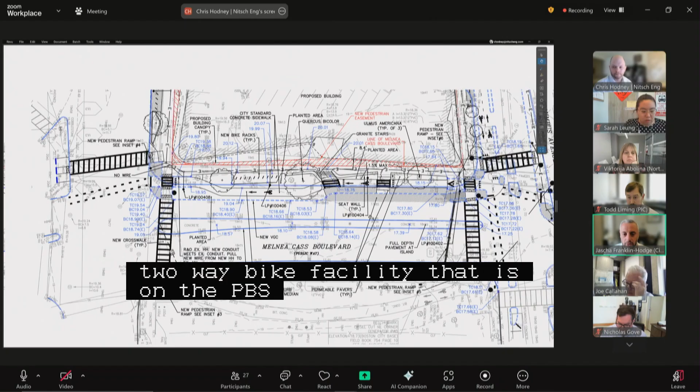Then also, if you do have bikes making that move, is the plan to signal-separate the right turns coming off of Melnea onto Tremont Street in order to protect cyclists there? So I'm just a little perplexed by that whole setup and the reasoning behind it. Typically what we're trying to do at Melnea is get people onto the off-street separated two-way bike facility that is on the plan south here on the other side of the street, rather than dump them onto the main arterial. So this just seems like it doesn't align with that intention from a bike network safety perspective.

Sure. Ian, are you able to respond? Yes, good morning, Commissioners and Chair. Ian McKinnon from Howard Stein Hudson.

Completely appreciate your comment, Chief, understanding there is broader planning for bike connectivity in this area. The signal details themselves, we're at a 25% level of design. We made one submission to the signals team and are waiting for the next round of comments from them. But as it stands now, the intention was to create some connectivity. Understand there are no formal bike facilities on that side of the road going points east. Our goal here is just to make sure that facility doesn't abruptly end with no connection.

So I understand what you're trying to get at. We can take a look a little bit more at this, and really our goal is to hopefully connect people back to the shared use path at the other intersection, but understanding even this block would have bike users, particularly with this large new academic building with lots of students in it. So yeah, let us take a look at that and see if there's a better way to connect them at this intersection.

Yeah, no, I'd appreciate that. Even in some future state of Melnea Cass where there's a shared use path on both sides of the street, which I know has been discussed at various points, this connection is not - unless that slip lane is being eliminated, it creates a very dangerous condition for cyclists on the other side of the pedestrian island, where they would then need to cross a slip lane coming off of Tremont Street northbound.

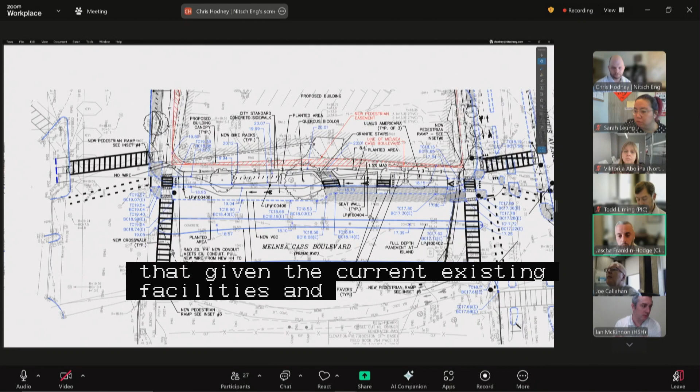So it seems like given the current existing facilities, an option might be to try to cross bikes with pedestrians over Melnea Cass to get them onto the north side of Melnea and allow them to access the shared use path that exists today that way.

So would just appreciate coordination with our planning folks and our bike network folks to come up with something that doesn't put people in harm's way. That also will simplify your signaling since you don't have to worry about right turn conflicts with bikes crossing Tremont Street. Exactly, yeah, we'll pick that up with them.

I know they've reviewed this submission once, on addressing all of their concerns. Okay, appreciate that. All right, moving plan east to Columbus and Melnea Cass.

I just want to confirm that there has been full coordination with the BTD signals team on the placement and design of any signal infrastructure or the relocation of any signal infrastructure related to this intersection. I haven't had a chance to discuss with them directly, but it's an intersection with not particularly efficient signal operations and a lot of potential for improvements with detection and other strategies. So I just want to make sure that team has a chance to fully evaluate the physical infrastructure that's going in, to make sure we're not accidentally foreclosing any future signaling or traffic engineering changes they might have envisioned.

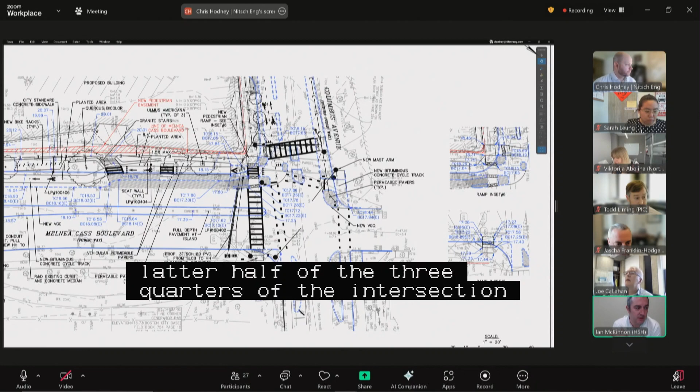I can also answer that question too. Ian McKinnon again from Howard Stein Hudson. So as Chris alluded to, this has been a long-term strategy to upgrade everything at this intersection. When the EXP building went forward, the bottom right corner here was addressed, all the equipment was upgraded. This project is picking up the latter half of the three corners of the intersection, replacing all the equipment, new detection, new push buttons, bike signals - a ton of things going into this to control and make this a safe place for all.

BTD's signals team and also the I&D team have all reviewed this. We haven't finished that formal review, we're in one round, but initially there were no concerns about placement of particular infrastructure, to my knowledge. So hopefully that addresses your question. Yeah, no, it does, and I appreciate you confirming that coordination - happy to see there's thought going into all the optimization here.

So staying at this intersection, but I'll ask a general question and then a more specific question. This stretch of Columbus Ave between Melnea Cass and the Ruggles T Station and the Southwest Corridor connection is extraordinarily chaotic from the perspective of cyclists, pedestrians, drivers. It functions as one big indistinct mixing zone of everyone, and I see some really great thought and effort into trying to organize that here.

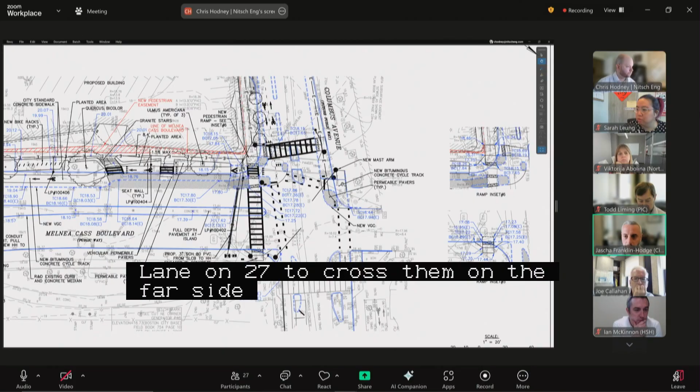It appears that the goal, if I'm interpreting the intent of the plans correctly, is to take southbound bicyclists on the southbound on-street lane on Columbus Ave and cross them on the far side of the Ruggles Lower Busway into this new two-way facility running alongside the new building and existing building going up towards Ruggles Station in the southbound direction. So I have two related questions to that.

One is - plan north - I am curious how we then intend to cross people back to the Southwest Corridor, and how that interface is intended to work at the giant crosswalk in front of Ruggles Station.

But while we're on this part of the page, this is one of those unique locations where we have multiple bike facilities running in parallel along Columbus Ave. You can see at the very bottom of the page there's another two-way facility. Currently, cyclists have a choice: if they're on the on-street facility, they can stay on Columbus Ave as a vehicle in the travel lanes, or they can go up on the sidewalk alongside the garage and in front of Ruggles Station. So I'm curious what our intention is with people using the sidewalk-level two-way facility along Columbus Ave traveling southbound.

Is the intention that they would continue to cross at the pedestrian crossing and merge in with pedestrians in front of the driveway entrance or garage entrance going past Ruggles Station? Or is the intent to somehow direct them across the street onto this new two-way facility and then cross them back to re-access the Southwest Corridor? I'm just a little perplexed as to what we're trying to steer people towards in all of this.

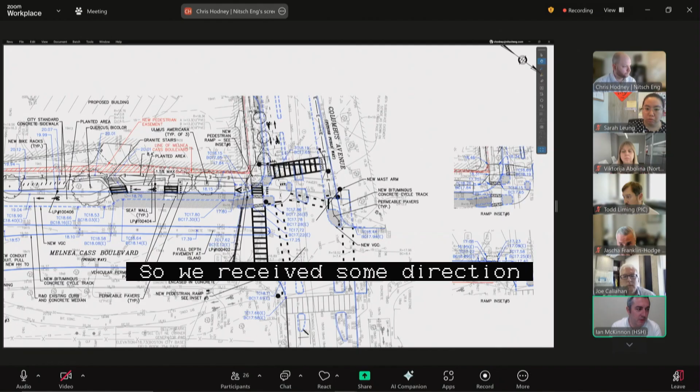So we received some direction to do a couple of things here. One is to create that new connection to Ruggles, understanding we're trying to bring cyclists away from that very busy mixing zone at the bottom of the stairs for the Ruggles Station. So the goal is to transition them to a new ramp that's built by that project, by others. I think the T is still working on that. And so we've coordinated with those plans.

The goal is to remove a lot of that conflict directly from the Renaissance Park garage, which is right up this face of the building on the right here, and to try to remove that conflict area by shifting them to an on-street facility. But that facility and that DCR Park, Linear Parkway, still exists and will.

But if they intend to cross here, there is a very wide shared use path crossing. You can kind of see some of the ramps there. It's not fully built or fully on this plan, but it was recently rebuilt as part of the EXP. It's a much wider, 12-foot wide ramp.

So that is the intention, because that's also a low volume crossing, since that's just a busway. So that's sort of the intention, to try to remove some of those conflict areas and make them into safer areas. But this also allows connectivity to the Ruggles Street project that just finished as well. So having them on that plan west side allows for those direct connections further down into Roxbury. That's sort of the vision here, I think, from a planning perspective.

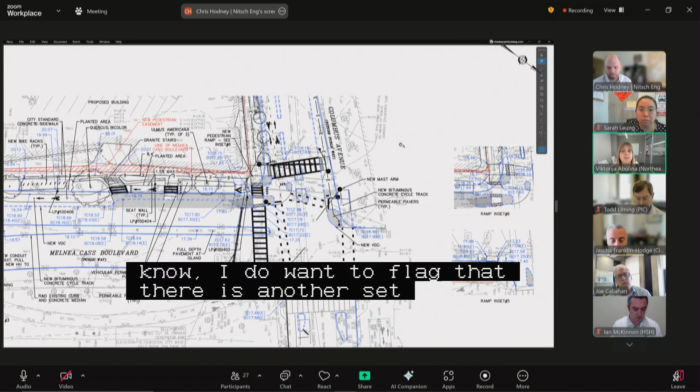So the Renaissance Park garage is not the only conflict, but you do end up pushing cyclists across the two intersections to be able to make it.

And just from being in this area all the time, folks that are on the DCR path don't go on the city street, and then the folks that generally like to ride without any humans in the way, they'll stay on the street. So the bikers that are on the street stay on the street and usually don't weave in to try to navigate around students. But people that like to be on the path, the DCR path, will stay and go through the newly built, rebuilt path in front of Wren Park Garage, EXP, and ISEC. Yeah, so they stay on the sidewalk and then they go past Mass Ave Station and keep going.

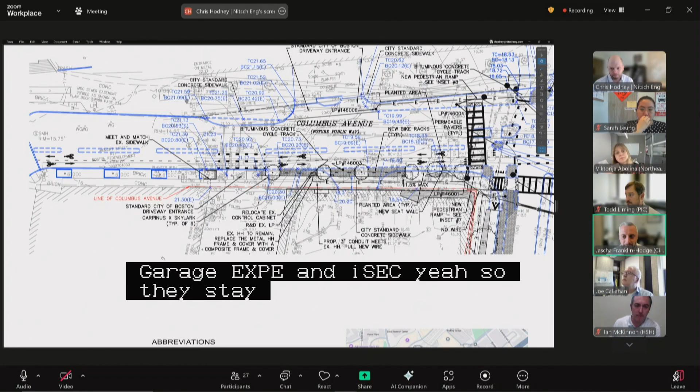Yeah, this whole complex is a fascinating lesson in revealed preference and the different risk tolerances that different people have. So appreciating the point that this is coming from inside the building at City Hall, I don't want to put the proponents in the position of having to answer for our own internal teams' perspectives on all of this.

I think from a PIC perspective, though, it's important that we as a commission feel comfortable that the physical changes we're approving to the street, even if they're directed by our own planning team, align with some kind of a strong long-term vision, so that we're not in the position of having to change the street again at some point in the future.

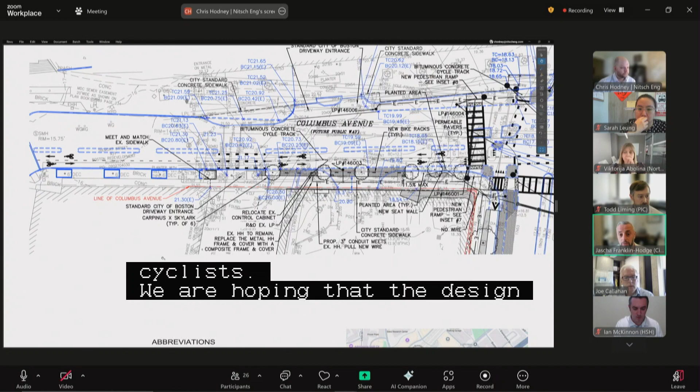So I think we can take this as our own internal action item to do a check-in with our teams about the intentionality behind this, because to be comfortable with this, I need to understand how it fits into that larger network plan and what kinds of behaviors, particularly by cyclists, we are hoping that the design the PIC is reviewing today will induce, and want to make sure that seems plausible in terms of the desired outcome.

Because what I would like to avoid in a situation like this is, for example, that southbound cyclists on the on-street lane don't want to do that double crossing and then the crossing and then the cross back. And so then they find themselves either with more bikes on the pedestrian shared sidewalk in front of the Renaissance Park garage, or with those bicyclists in a narrowed street right of way in conflict with vehicles.

So I think I want to make sure that we have a coherent picture of how this all fits together and it passes the sniff test before we go ahead and make permanent changes in the roadway to accommodate a particular future vision on this segment. I will take action internally to get that view, but we may need to pull you all back into that discussion if there are any changes resulting from that, or if there are questions we'd want answered on this part of the project.

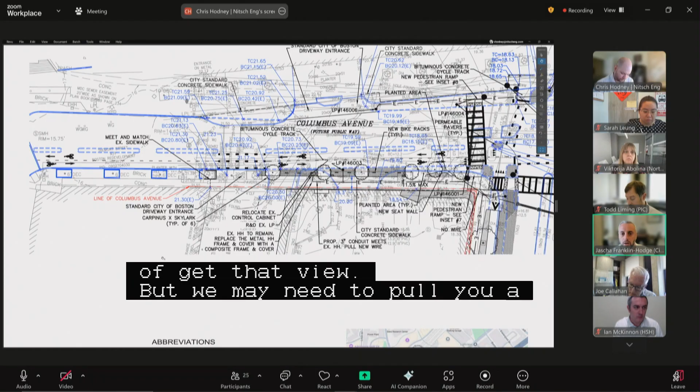For example, that question of whether we want to put in any additional guidance for people on the off-street cycle track north of Melnea to guide them in one particular place or another. So, long way of saying we have a little bit of internal homework to do, but let's stay in touch on this before your next hearing.

And I'll just end by saying I really appreciate the effort to organize this space. It's desperately in need, so I just want to make sure we get it right when we do it.

All right, that is all of my questions. PIC staff or members of the public? I think we're good on this one for now. All right.

Thank you. Yeah. All right, on to our last agenda item, new business 10, 316 to 318 and 331 to 339 Northern Avenue, South Boston, vertical discontinuance, and a joint petition by Vertex Pharmaceuticals and the Economic Development and Industrial Corporation of Boston. The proponents please introduce themselves and their affiliations and walk us through what you are proposing to do.

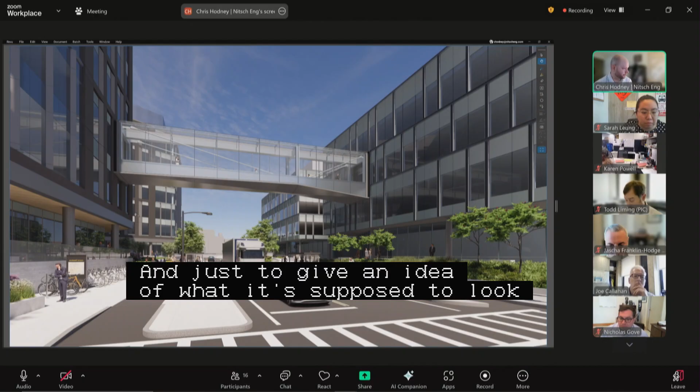This is looking down Northern Ave. We've got the currently under construction building on the left and the existing building on the right. So I will open it up to questions. Commissioners, questions?

All right, PIC staff or members of the public? Chris, or someone else, it'd be nice if you could just speak a little bit to the urban design review that's occurred through the planning department on this. I know there have been a lot of conversations surrounding this bridge.

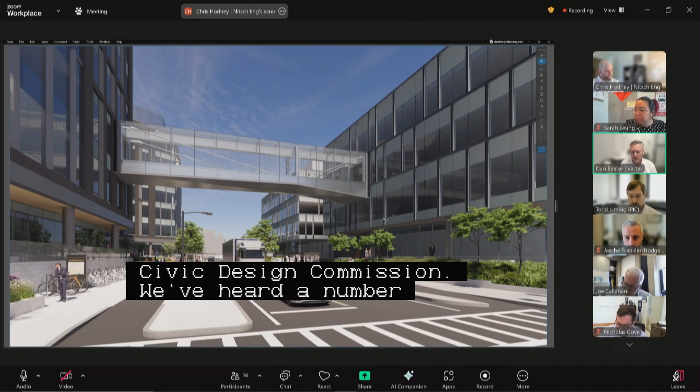I can address that. Yes, hi, good morning, Chairman and members of the Commission. My name is Dan Baxter. I am Senior Director of Engineering and Capital Projects at Vertex. I've been involved with this project from the beginning. It has gone through lengthy discussions with the Boston Planning and Development Agency and through their urban planning group, as well as through the Boston Civic Design Commission. We've heard a number of comments and adapted the design as you see it here to meet those comments. We have presented to and been approved by the BPDA Board of Directors and continue to make the final small bits and pieces of adjustments with BPDA's involvement relative to selection of materials and things of that nature.

All right, Todd, any further? No, that answers my question. Thank you, just wanted that for the record. All right, thank you very much.